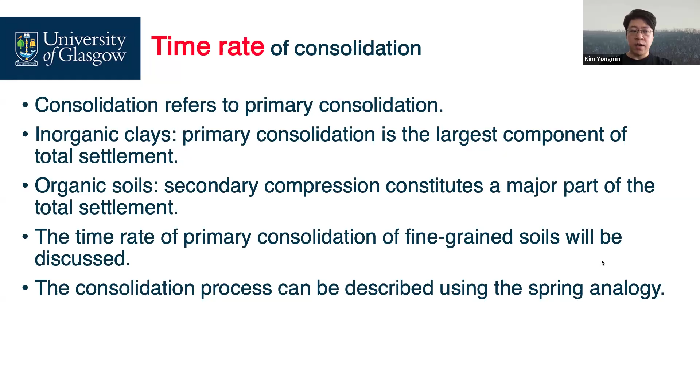As mentioned before, consolidation is time-dependent behavior. That's why we need to deal with the time rate of consolidations. Inorganic clays, primary consolidation is the largest component of total settlement, but organic soils mostly contribute to secondary compressions. The time rate of primary consolidation of finer soils is quite critical, which is why we come up with new terminologies.

Before we move forward, this is a fundamental assumption to think through our one-dimensional consolidations. Our pioneer of soil mechanics, Terzaghi, made an assumption that our soil is homogeneous. This soil looks identical.

The soil is fully saturated, and soil particles and water within the voids are incompressible. Because when we apply load, our pore water initially supports this load. But this water looks incompressible, so we don't need to calculate the compressibility of water.

Soil particles are solid, but they look incompressible too, so we also don't calculate soil's compressible settlements. Soil and water inside the voids, when we apply load, this void is constantly reduced, which causes soil compression and consolidation. We don't focus on the soil particle itself compression and water compression.

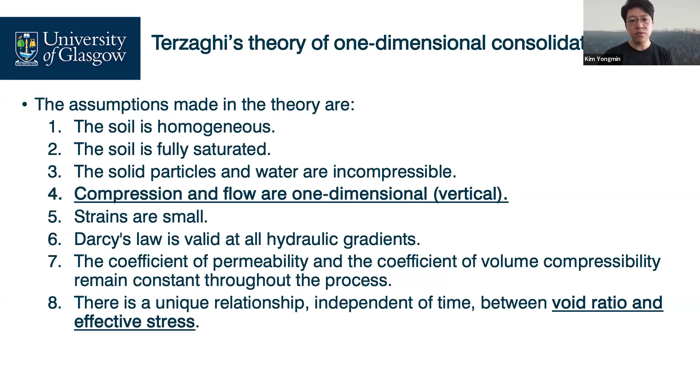Based on these assumptions, Karl Terzaghi proposed the differential equation to understand one-dimensional consolidation. Please do not memorize, but try to understand what this equation means.

U is excess water pressure over time. Excess water pressure changes over time. What parameters contribute to excess water pressure changes with time?

Let's take a look. First one is MV, coefficient of volume compressibility. Gamma W, water density, water unit weight, and soil's permeability. And yes, this is the water pressure and also depth. All these phenomena affect excess water pressure changes.

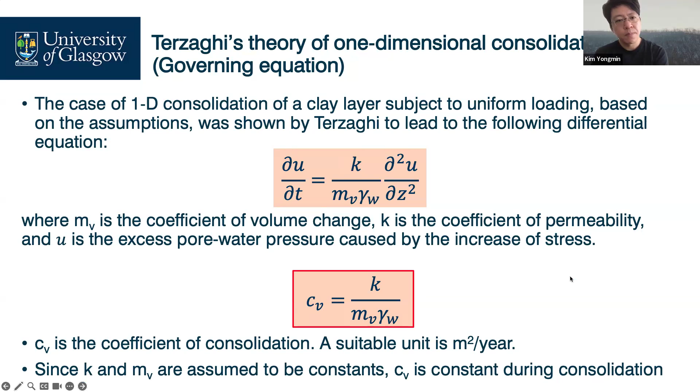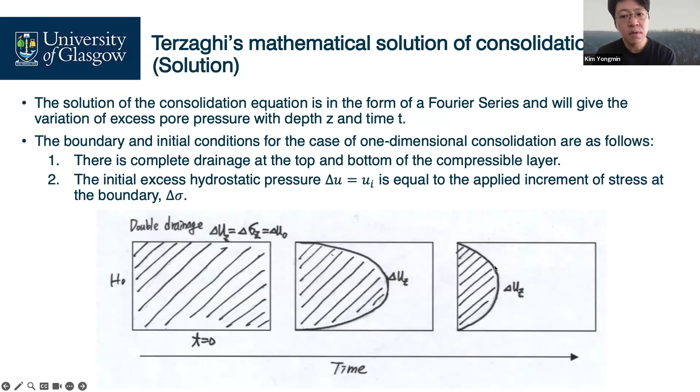At the beginning, the entire clay layer has uniform excess water pressure, right? No drainage has occurred yet. The pressure is evenly distributed as a fully shaded zone. This is excess water pressure.

At a certain time, drainage starts from where? Top and bottom, because of double drainage systems. If we say single drainage, only the upper part - probably this shaded area, only this one - has drainage.

So this excess water pressure begins to dissipate from the boundaries and gradually reduces toward the center. This pressure distribution now forms a curved shape.

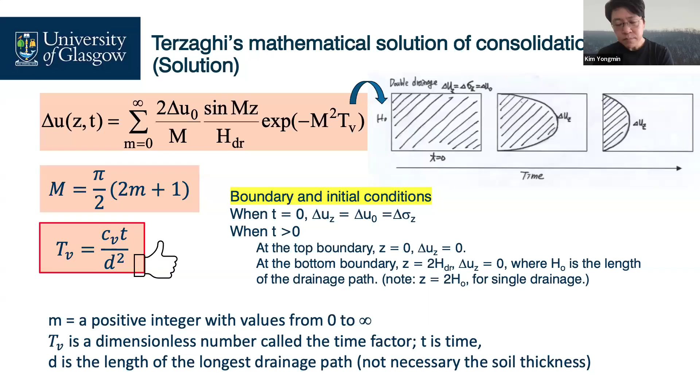Degree of consolidation, saying 50%, 80%, 90%. But this degree of consolidation, later on, you can take a look.

Let's think through the soil elements at a particular soil depth and time. This degree of consolidation specifically says something about certain depths and certain times. Very specific. The progress of the consolidation process under the particular total stress increments can be expressed in terms of void ratios.

Initial void ratio, final void ratio, current void ratio. For example, this UZ equals to 0 means the consolidation process has not begun. If this one is 1, means E equals to final void ratio. It means that consolidation is complete.

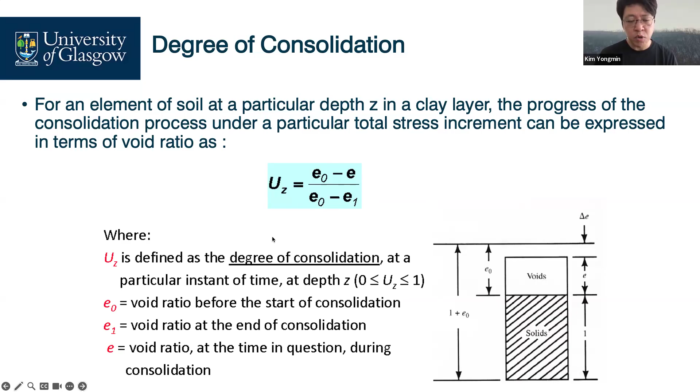This is the expression of the degree of consolidation by void ratio, also expressed in terms of stress. Let's assume your compression curve looks linear. Here is the initial effective stress. Here is your final effective stress. Here is your initial void ratio, final void ratio, and E and sigma prime is your current effective stress and void ratio. From this relationship, we can express our degree of consolidation with respect to stress, effective stress.

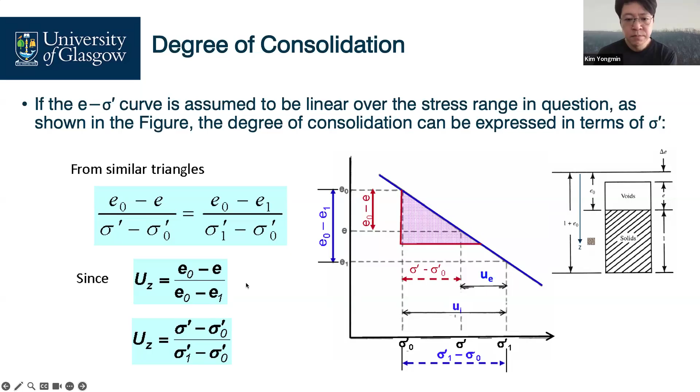If sigma prime and excess pore pressure UE is available at any time during the consolidation process, and UI is the initial excess pore pressure, here, UI, initial excess pore pressure. Then we can express this degree of consolidation in terms of pore pressures. The physical meaning is the degree of excess pore pressure dissipation on the basis of initial excess pore pressure. I've tried to explain the degree of consolidation in terms of pore pressures.

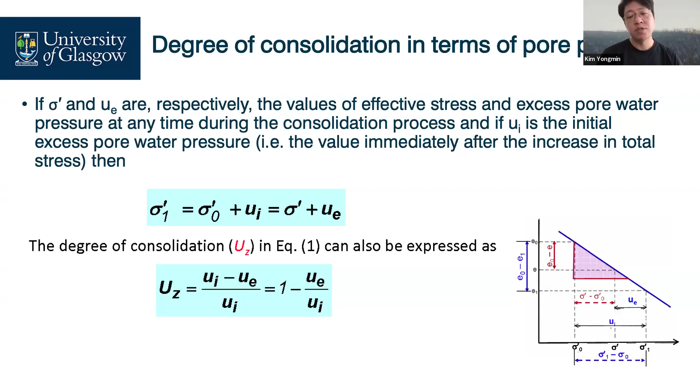Let's move on. In the degree of consolidation, the drainage condition is the critical factor for how fast the consolidation is processed. The layer where both the upper and lower boundaries are free drainage is the open layer. And a layer where only one boundary is free drainage is the half-closed layer. Due to symmetry, the upper half of this diagram also represents the case of the half-closed layer of thickness D.

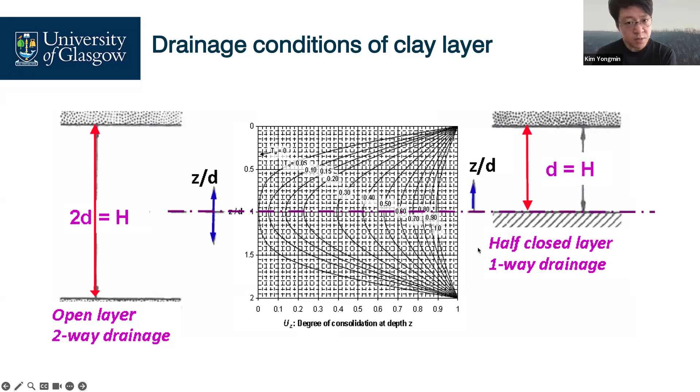Why is this important? In terms of time factors, D is the length of the drainage path. So for the open layer, here, the drainage length is half of H. And the half-closed layer we use just H.

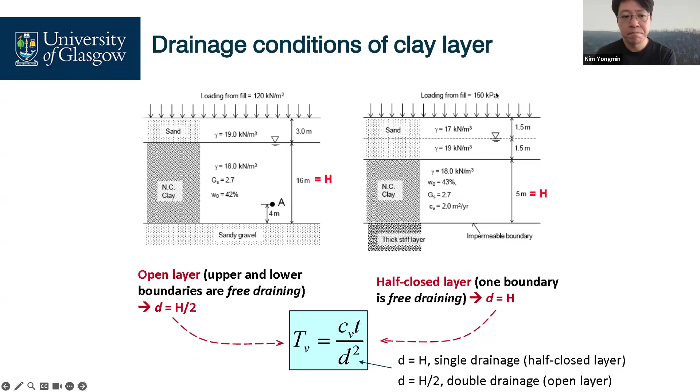In the open layer systems, the consolidation process should be faster than the half-closed layer, which means the construction period can be shortened. This CV can be obtained from our oedometer tests, and then roughly some researchers summarized it.

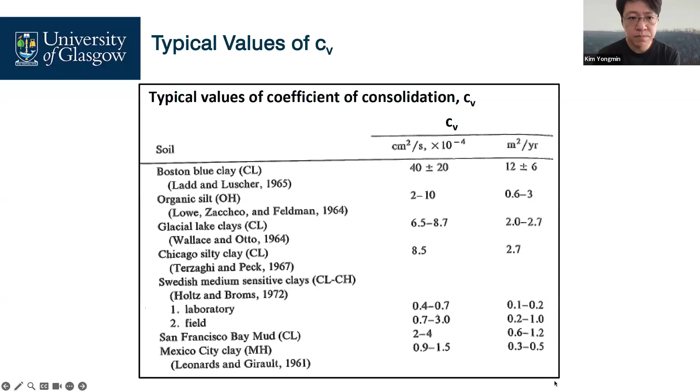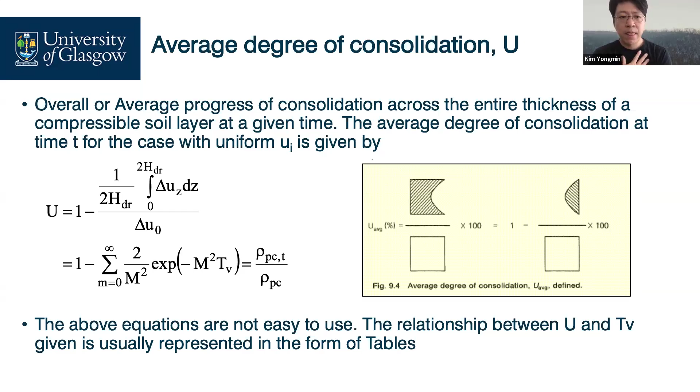I just mentioned I'm concerned about average degree of consolidation, but how can I use such a complex equation every time? So for less than 60%, we use these equations. This average degree of consolidation is related to the time factor. For more than 60% average degree of consolidation, we use these empirical equations.

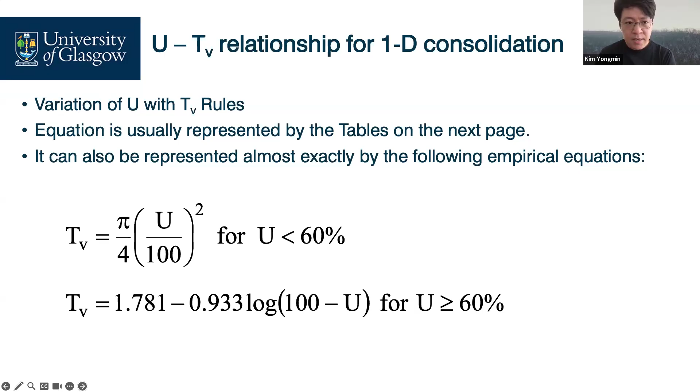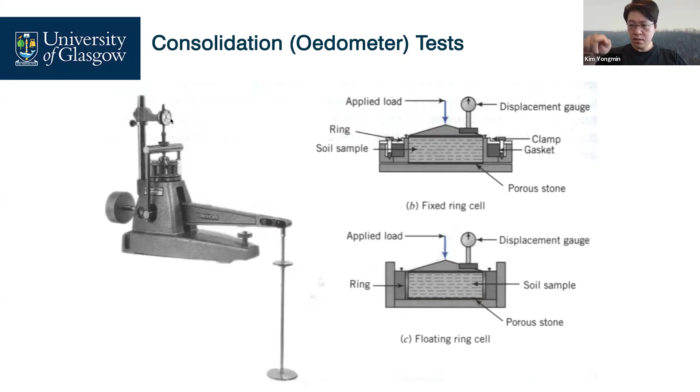Coefficients of consolidation, CV. From the oedometer test, we obtain CV. I know, but how can we determine the CV from the test?

We have two methodologies: one is the Taylor root time method, the other is the Casagrande log time method. This module only deals with Taylor's root time method. The value of CV for the particular pressure increments in the test can be determined by comparing the experimental and theoretical consolidation curves. This procedure refers to curve fitting.

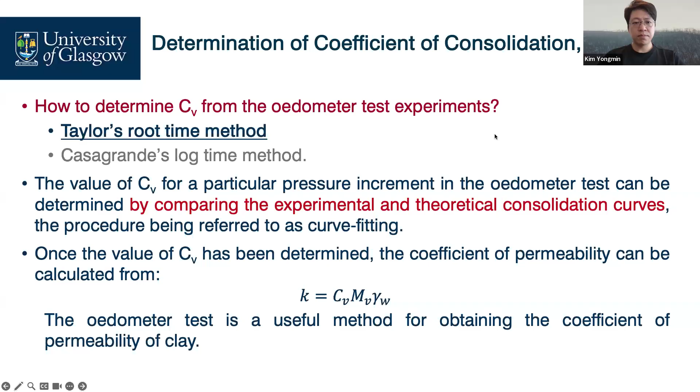Once the value of CV has been determined, then the coefficient of permeability can be calculated.

From the oedometer test, we will get CV, a known value. Time is given, for example 1 year, 2 years, 3 years. The drainage path is also known. And then we will get TV.

Perhaps the TV is 0.2, and then we can read off the average degree of consolidation, which is 0.5, or 50%. Then your total consolidation settlement is calculated using 3 different scenarios.

First one is the NC clay. Second one is the OC clay. Third one is the OC clay, but the final effective stress exceeds the pre-consolidation pressure.

So we have only three different equations to get the consolidation settlement. This settlement is for the final stage of the consolidation.

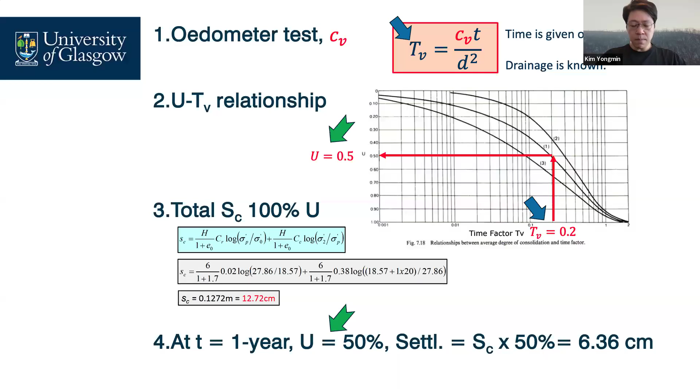Normally, the experimental result shows something like this, representing the initial compression curve, the linear part, and then the second curve - initial, linear, and second curve.

Point D corresponds to a degree of consolidation of 0, obtained by producing back the linear part of the curve to the ordinate at time 0. And then we also draw the straight line DE.

The line drawn has an abscissa 1.15 times the corresponding abscissa on the linear part of the experimental curve. So from here to here is L, and then we extend it a bit, 15%, to 1.15.

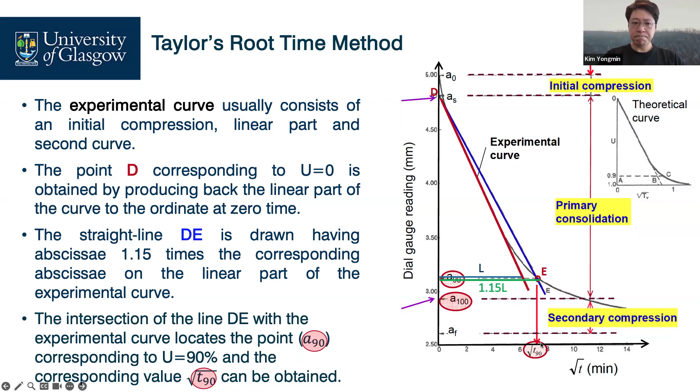On the experimental curve, draw the straight line - from here to here is L. We extend it 15% and draw the second line. This point represents 90% average degree of consolidation, and this x-axis represents the time to achieve 90% average degree of consolidation.

So from the Taylor root time method, T equals T90, always T90. TV90 equals 0.848. Why? Because the degree of consolidation of 90%, TV is always 0.848.

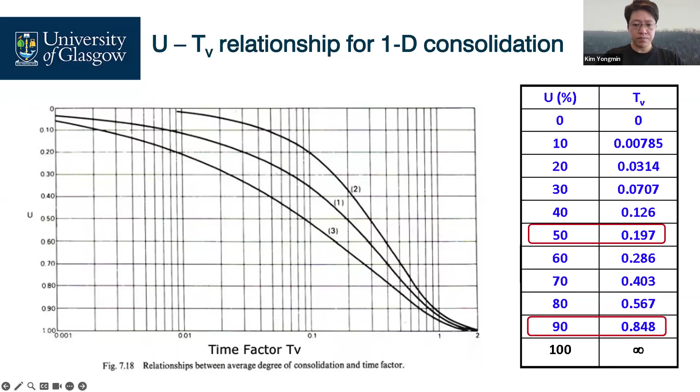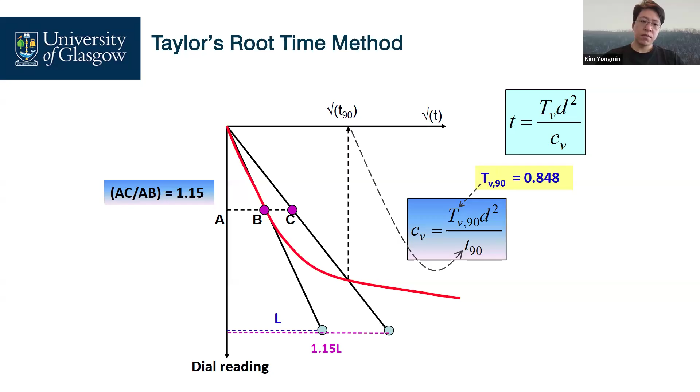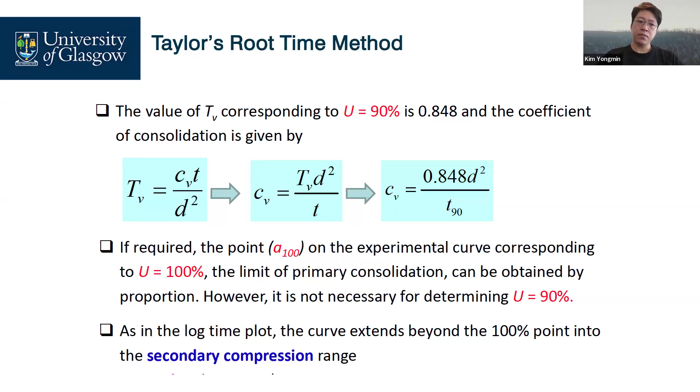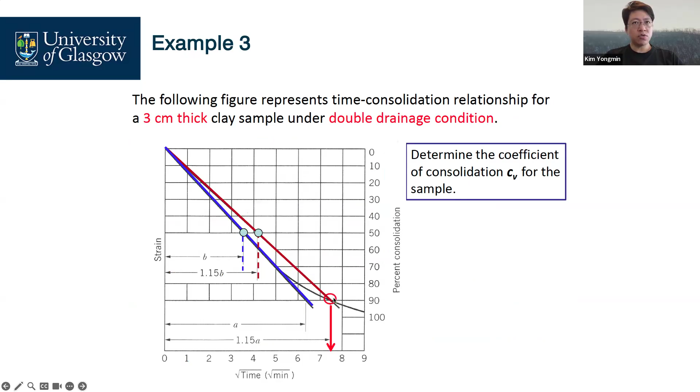Here is a clear example. Experimental curve, a straight line, another straight line stretched to 15%. Then we can simply get CV.